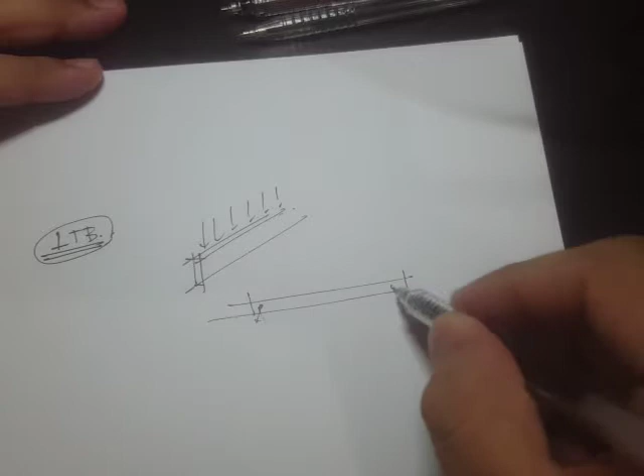One example is lateral torsional buckling. If we load a member in flexure, in a basic strength of materials course we are just taught that when you load this flexural member, what you get is a deflection, something like this. However, for steel structures or structural engineering, when you load this, it is possible that this cross section actually twists, something like this.

So that means it's also a failure, or from a design standpoint, we need to consider this. And you already know that this lateral torsional buckling only occurs because there's not much lateral bracing right here in the compression portion of the flexural members.

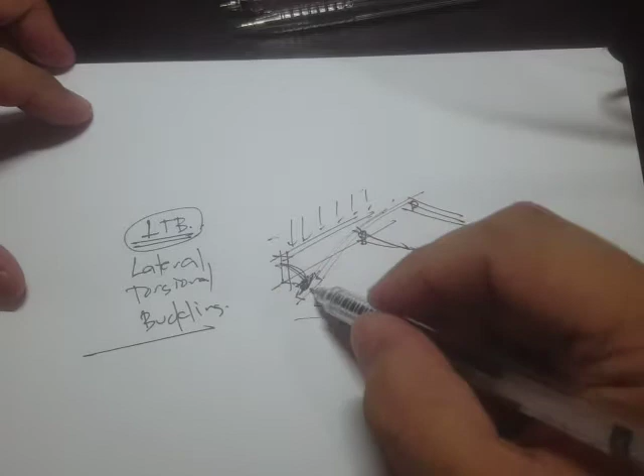And there are still many others, like for example the columns, axial members. So when you load this, then there's going to be buckling and things like that.

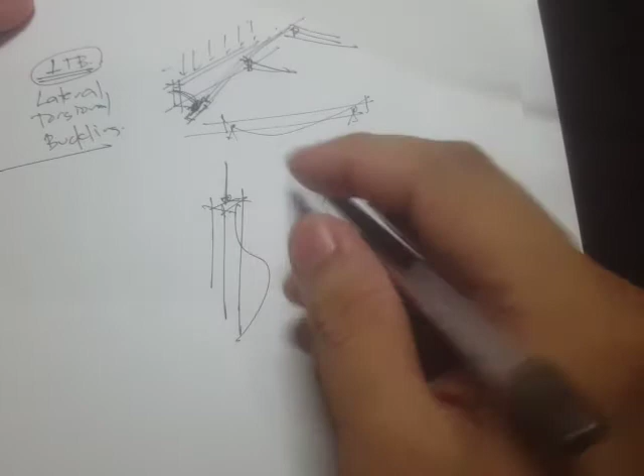So the reason I'm bringing this up is because if, let's say, you want to have a thesis about a machine or equipment, then probably you should consider, I suggest, the deflection aspects of the machine design.

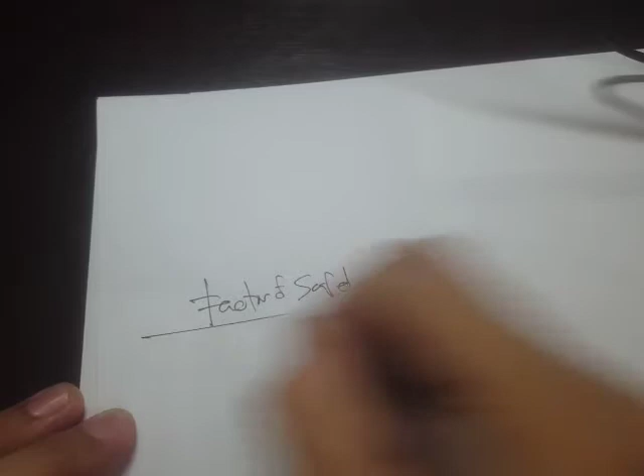Anyway, that's not our main topic, so let's get started regarding the failure theories and the factor of safety. As I've said, a factor of safety...

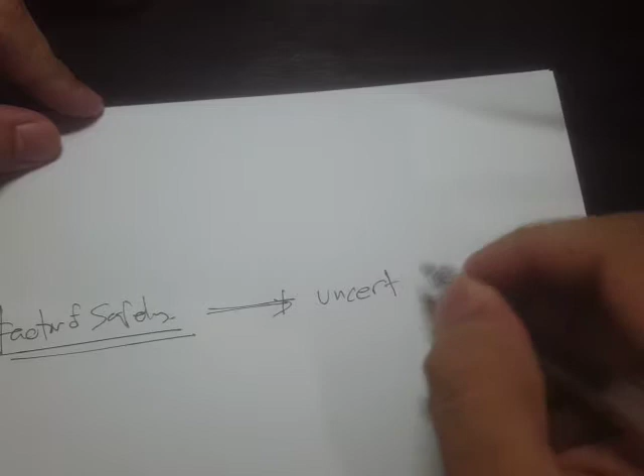When we talk about factor of safety, we are actually talking about design applications, and it's all about uncertainties. That's how I describe it. A factor of safety is roughly all about uncertainties in the design.

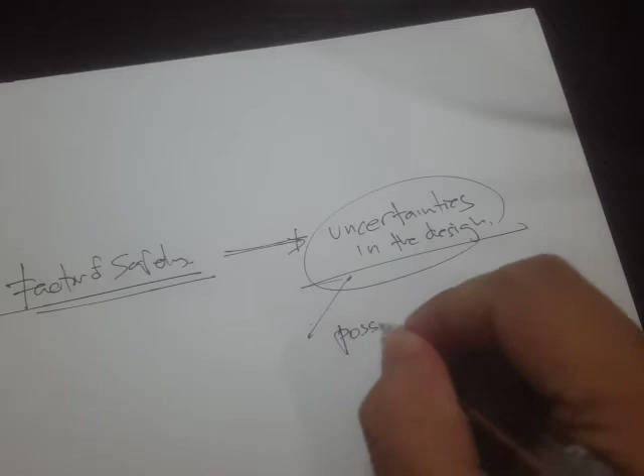And what are these uncertainties in the design? We can have examples, such as possible overloading or load estimations. For example, if we estimated a load, the question is: is it really the load that the part will experience?

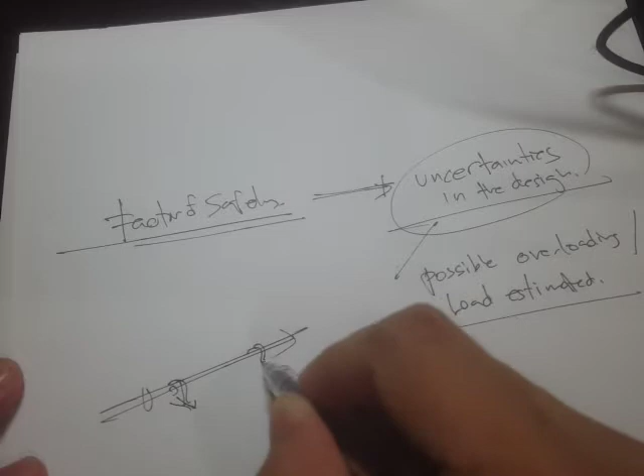during its service, right? For example, if we design a shaft, we estimate the load and compute the reactions and stresses, but in actual service, are the stresses the same, or would it experience possible overloading? So that's one of the uncertainties in the design.

Another uncertainty is the material, let's say material properties or qualities. What this means, or how I understand this, is let's say we have a steel specified as 250 megapascal for its yield strength. So SY is 250 megapascal for yield strength.

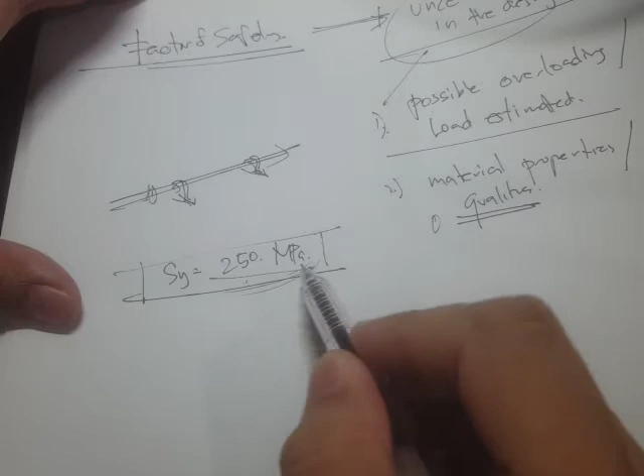Now my question is: is the yield strength of the part that you are going to use in the design going to have the same value? Is it 250 megapascal, or maybe it's lower? So there's going to be discrepancies or differences, and we can consider that as uncertainty.

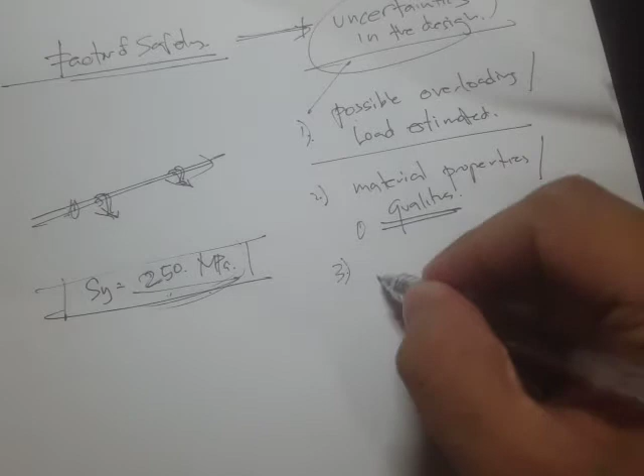Another one is the fabrication aspects. For example, in the drawing or the design intent, let's say we are going to load this part or this column in axial loading, and we design it so that this point load is actually acting at the centroid.

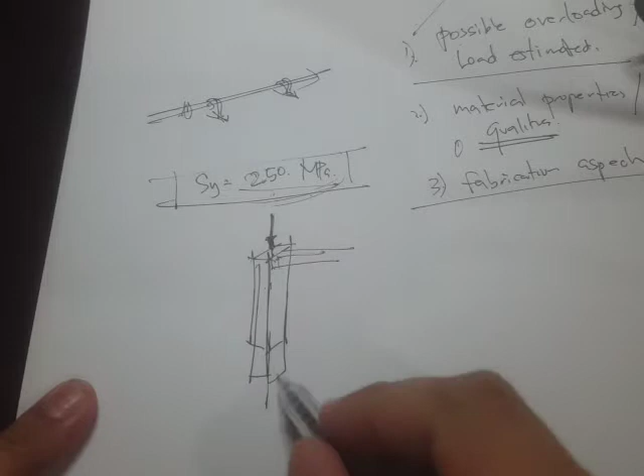However, due to fabrication aspects, like for example we have a brace here, and another brace, and of course during fabrication there's going to be welding on this part and another welding on this part. We know that in the welding process there's heat involved, and therefore there's going to be a temperature variation along or across this part.

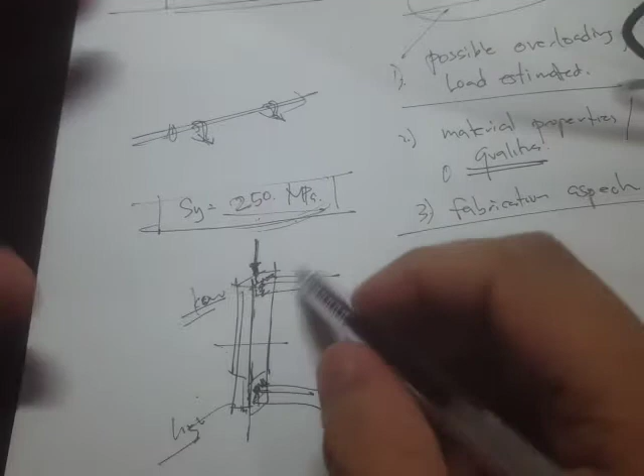If there's going to be an uneven temperature distribution, like this part being hot or high temperature and this one being low temperature, and if there's not enough bracing, then there's going to be distortion of this part. That distortion is a change in the geometry. So instead of having a purely straight part, if there's not enough bracing, it's probably going to end up crooked, something like this.

And the problem is that if you apply a load, instead of that load passing through the centroid of the section, it's not actually passing through the centroid, and there's going to be eccentricity. So because of the presence of eccentricity, you don't just have a normal load, but also a moment as well.

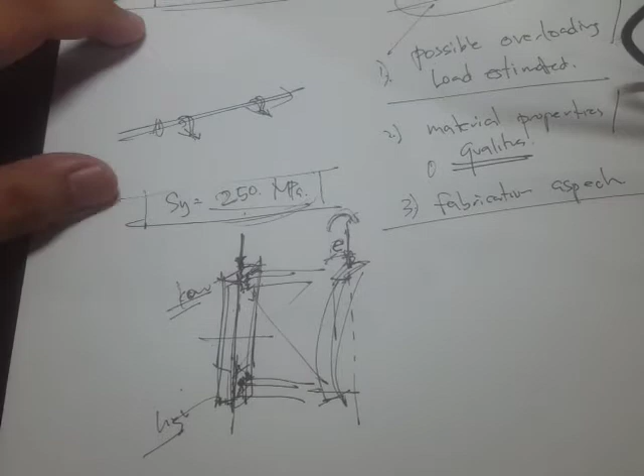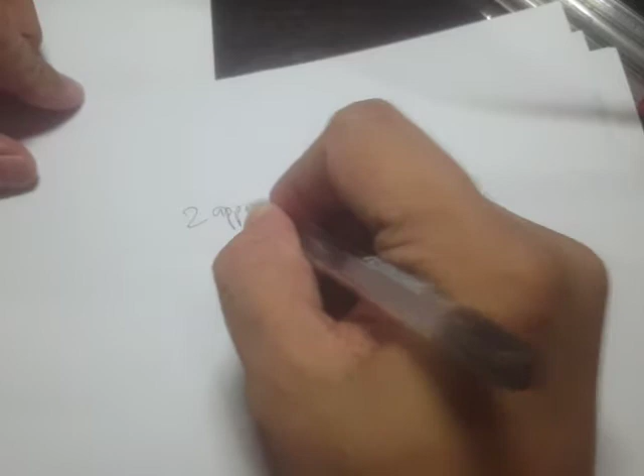So those are some of the uncertainties in the design, and there are still many others. So the question for a designer is: how do we guard ourselves from these uncertainties? You already know, in ABE161, the agricultural structures engineering course, about the two approaches for design. One is the ASD, and the other one is the LRFD.

This one is the allowable stress or allowable strength design. Although previously this was referred to as allowable stress design, they changed it to strength so that it's on the same basis as the LRFD. However, for machinery design application, I think allowable stress design is still the term that's being used.

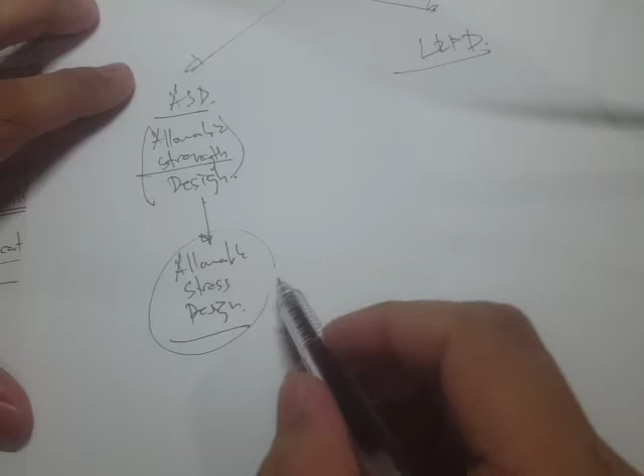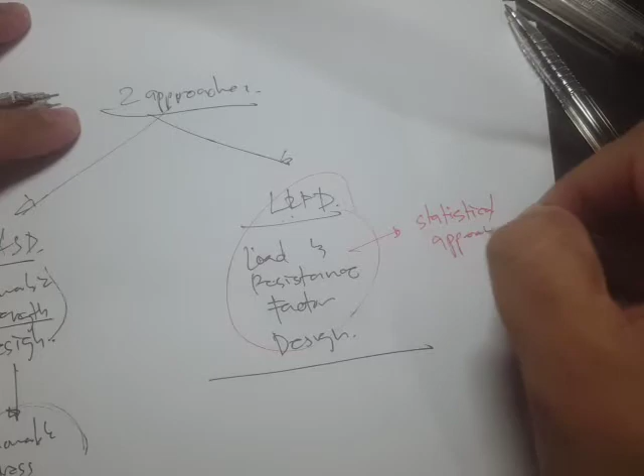And this one is referred to as the load and resistance factor design, LRFD. We know that this method is more statistical, a statistical approach, while the other one is a conventional approach, and you already know the difference.

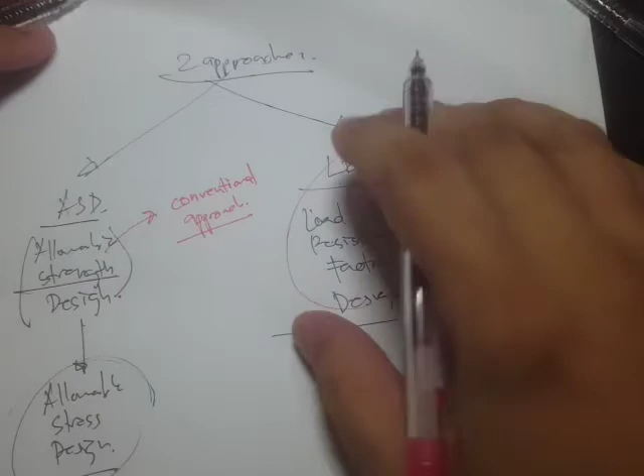We did also sample problems or computations regarding this. Although some machine design textbooks have included some portions or pages regarding this LRFD, or mention the statistical approach, in my opinion there's not much data regarding the use of this for machine design application as compared to civil engineering applications.

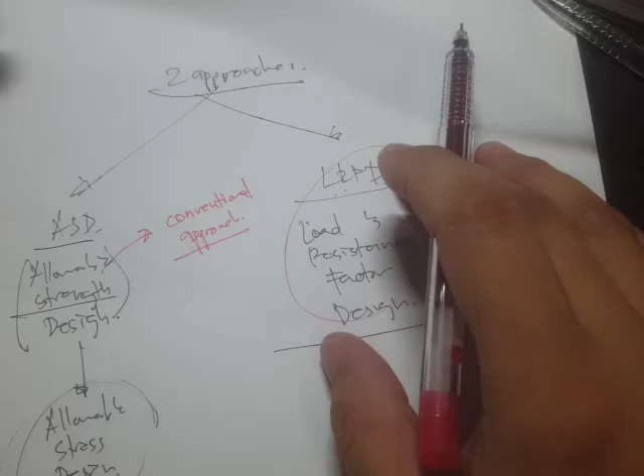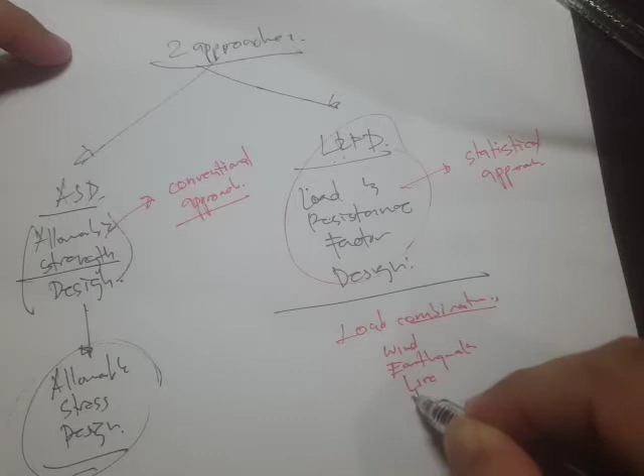For example, in civil engineering applications, we have load combinations. What if, let's say, we have a wind load and earthquake load and live loads and dead loads, or whatever loads, in combination acting on the building or the structure, then how do you work for it? They already have load combinations, and they have data for the live loads and things like that.

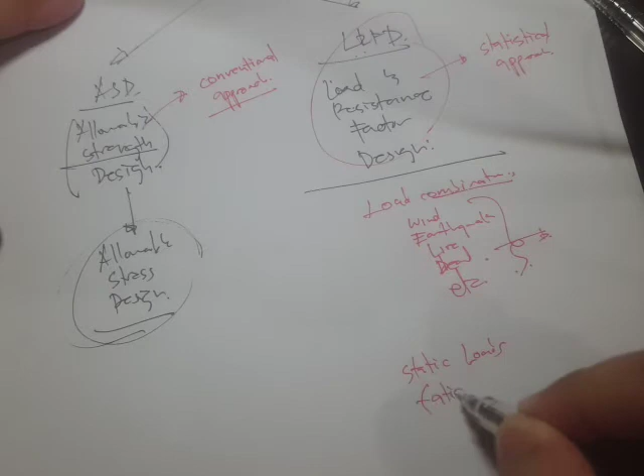So for machinery design application, I haven't seen yet data regarding, let's say, a combination of static loads and fatigue loadings or impact loads or whatever other parameters. I haven't seen this yet, so that's why we are not going to use this approach, and we'll just stick with this allowable stress design.

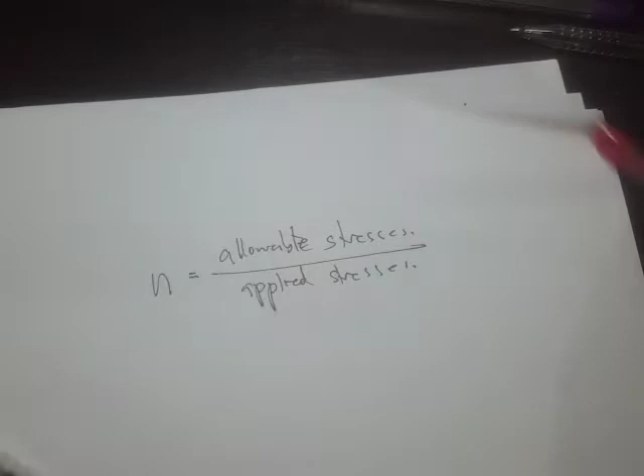So how does this factor of safety enter the equation? We have this equation: n, the factor of safety, is simply equal to the allowable stresses over the applied stresses. What that means is that the allowable stress is like our strength side in the LRFD, and the applied stress is the load side.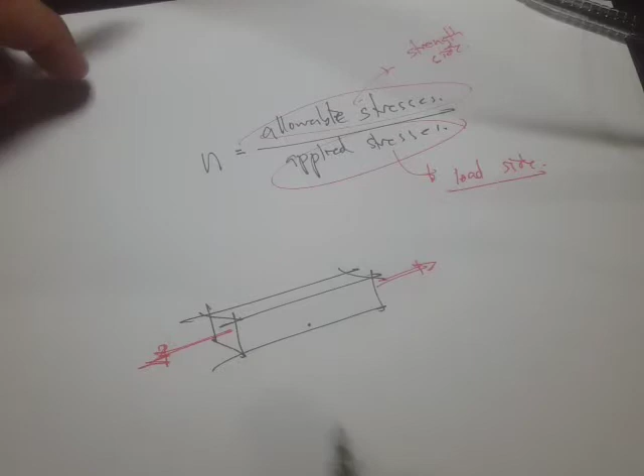Because the idea for the design is that if you have this part, let's say we load it in tension, then usually for the design we don't want this part to fail. So if we don't want failure, we can divide it in terms of the strength or the capacity.

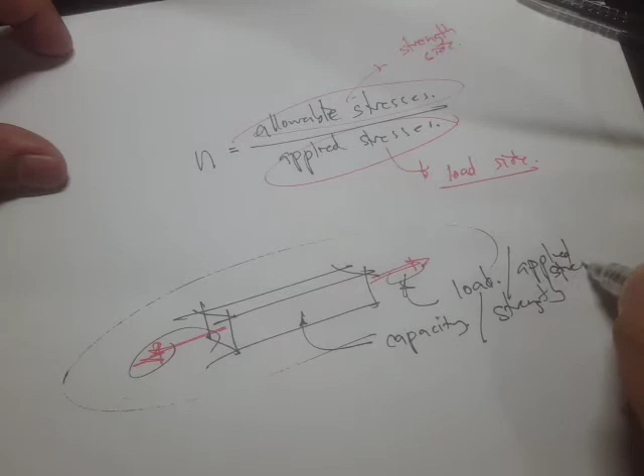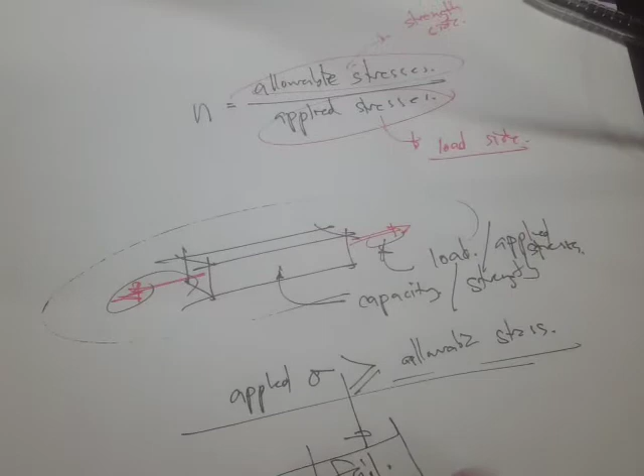So it has a capacity or strength and the load that you are going to put on this part: the load or applied stresses. If the applied stresses are greater than the strength, the allowable stress, or the capacity, then that means the material will fail. Typically, when we design, we don't want our part to fail. So here's our equation for the factor of safety.

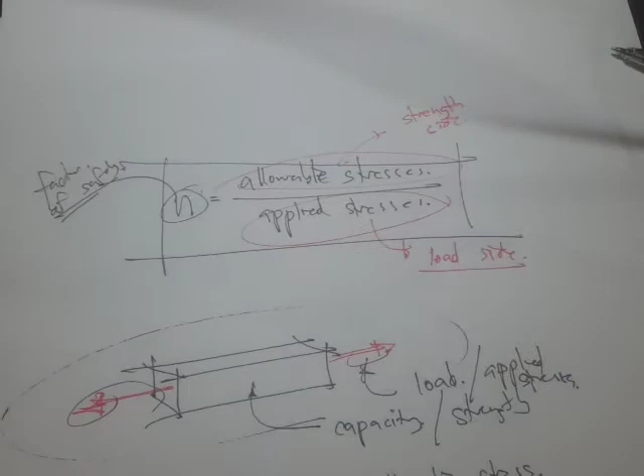We can also describe factor of safety in terms of geometric illustrations, because later on when we talk about failure theories, it can also be an aid to refer to the diagrams.

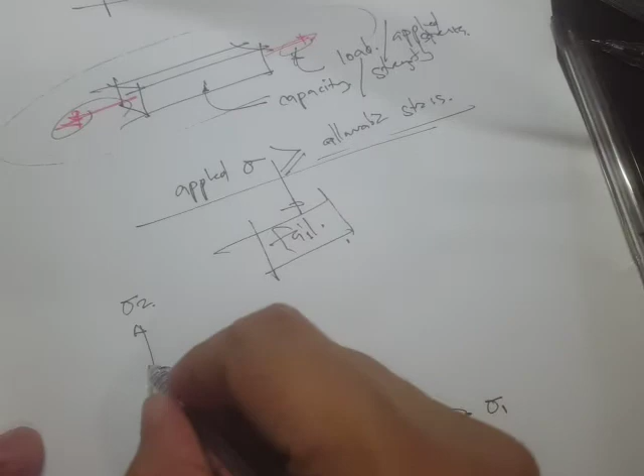Typically we'll have a graph of the principal stresses, the maximum stress here, and the minimum principal stress here. We'll have some curves, for example this is SY, the yield strength, and we'll also have yield strength right here. So here's our failure, this is what we call the failure locus line.

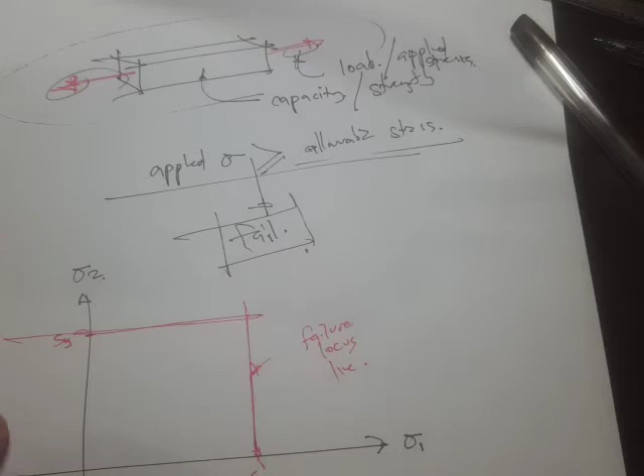If you are outside the failure locus line, then that's unsafe, and if you are inside, then you are in a safe region. This is just an example; there are many other curves, and we'll talk about that when we get into the topic on failure theories.

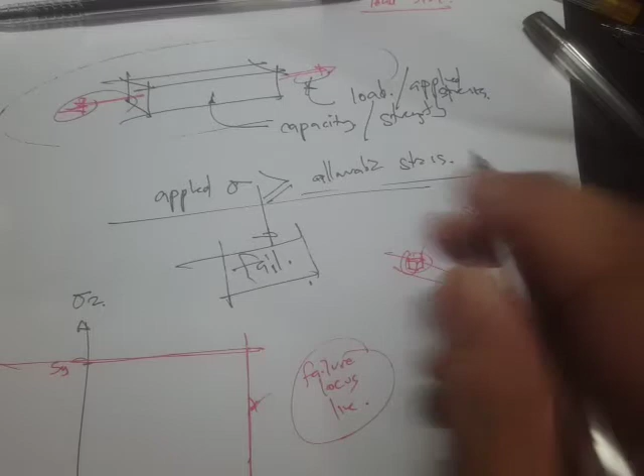But regarding this factor of safety, this is the strength side. Our load side would be, let's say we have a part and we load it in flexure, axial, and also torsion, and we compute the stress state here. So stress state is something like the actual loadings experienced at that point.

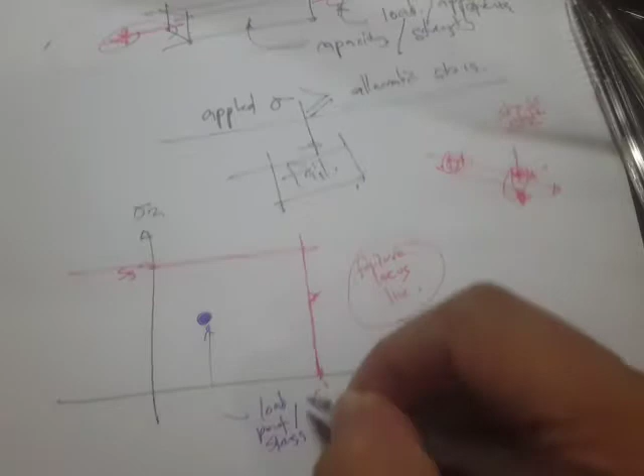At that point we have a load point right here, so here's our load point, or stress state. And the factor of safety is that we'll project a line from the zero point to this load point, and of course we are going to intersect this failure line, and there's going to be a point right here.

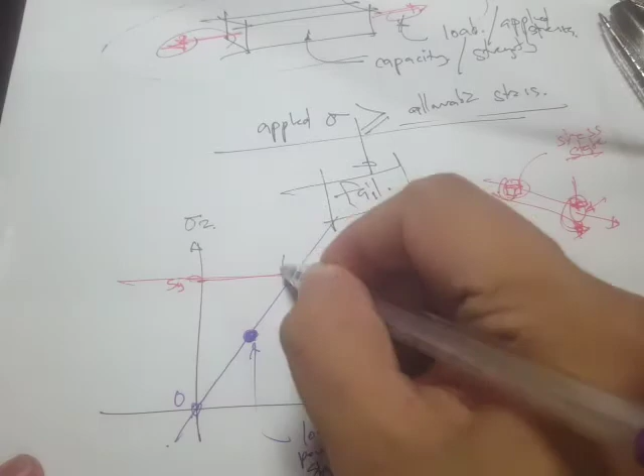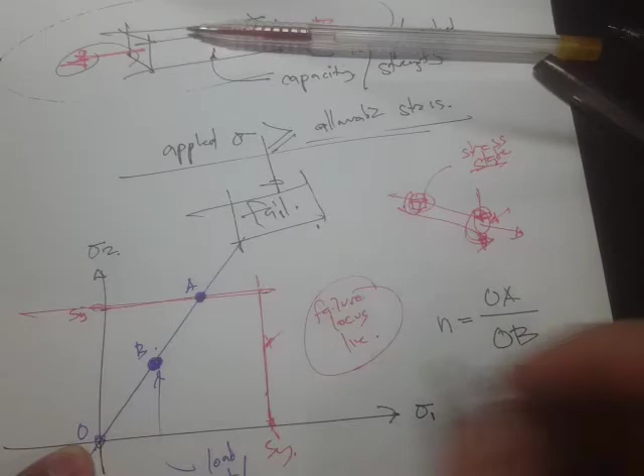So let's say this is point O, this is point A, and this is point B. We can say that the factor of safety is simply the strength: the line from point O to point A, divided by the line from point O to point B, because that is the load side and this is the strength side. Let's label this: this is the load side, and this is the strength side.

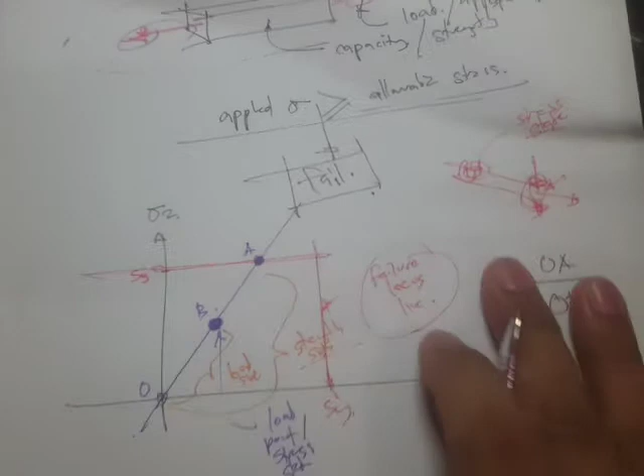The strength could be in terms of yield, ultimate tensile strength, or endurance limit, and we'll discuss that in detail later. So if this is the numerator and this is the denominator, that means we'll have a value of n greater than 1. If n is greater than 1, that means we are safe. The more you are away from this, the more safe it is in terms of this concept of factor of safety.

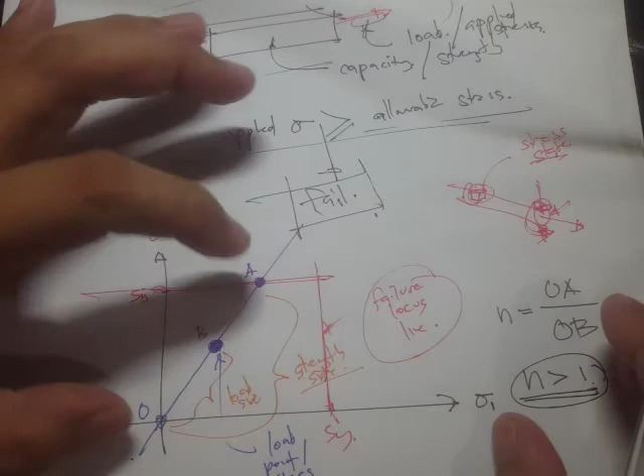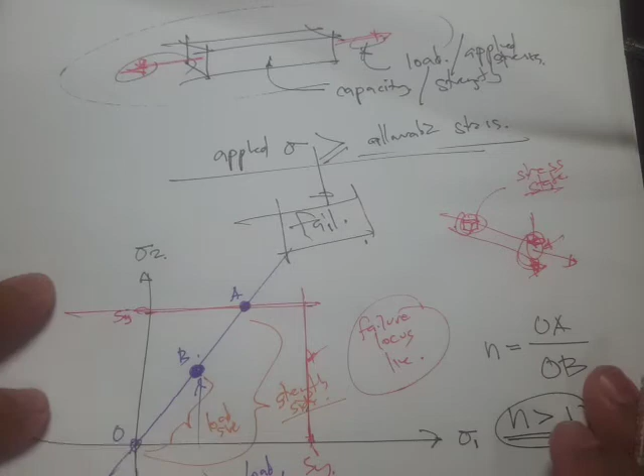But of course, the more you are away from this, practically there's another factor that comes into play, another aspect of design, and that's the economics. So anyway, that depends upon the designer. It's up to you if you want a larger value of factor of safety, depending on your design situation and the designer.

So if we have n less than 1, that means the denominator is larger compared to the strength side, then that's going to be failure.

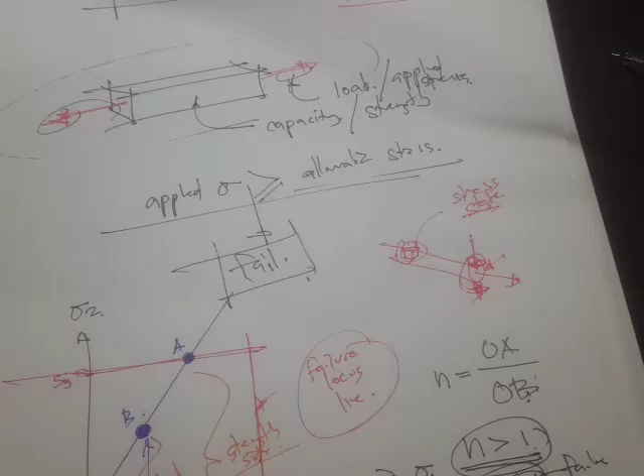I'd like to show you one from one of our reference textbooks about recommended values for a safety factor. By the way, this textbook is by Juvinall and Marshek, Machine Component Design, and there's a portion about the recommended values for a safety factor.

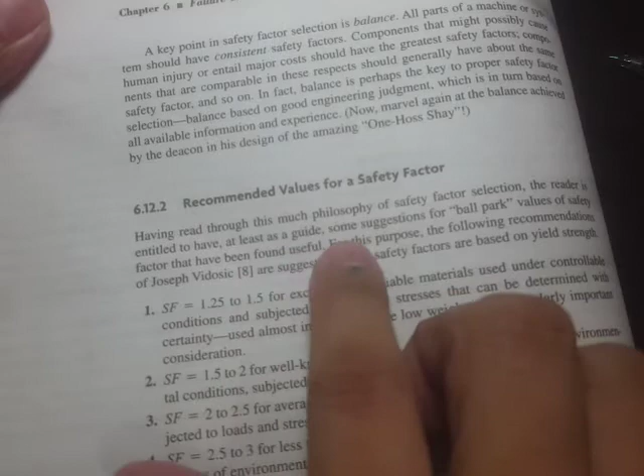Instead of computing the values of a factor of safety from the failure theories, there are some ballpark values, some suggestions, at least as a guide. The point here is that we can have a feel or grasp of understanding regarding the range of values for the factor of safety.

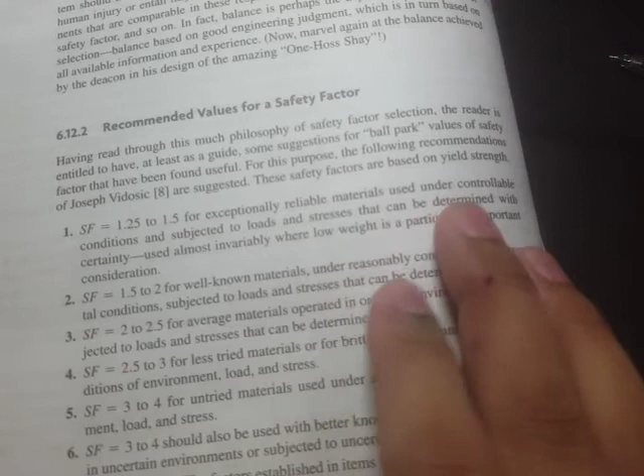It says here, for example, if we have exceptionally reliable materials used under controllable conditions and subjected to low stresses that can be determined with certainty, then typical values for the safety factor is 1.25 to 1.5.

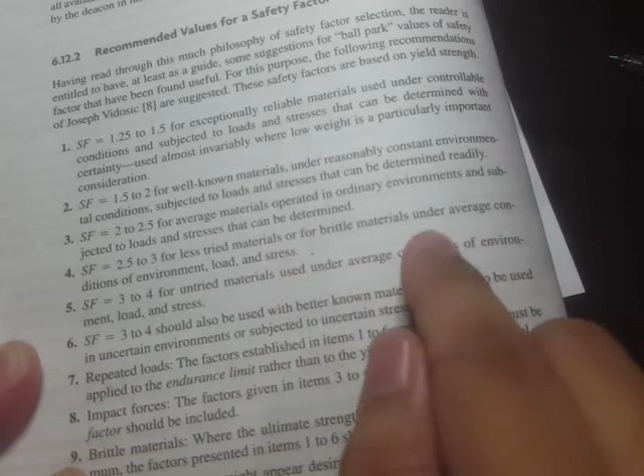Let's move on to number 4. For example, we have less tried materials, or brittle materials under average conditions of environment, load, and stress, then the factor of safety increases to 2.5 to 3.

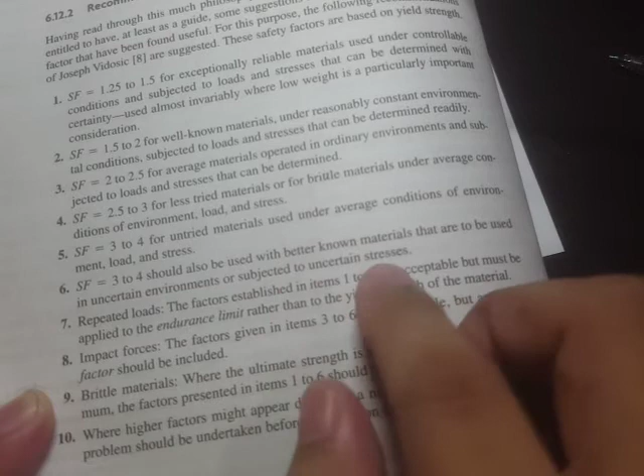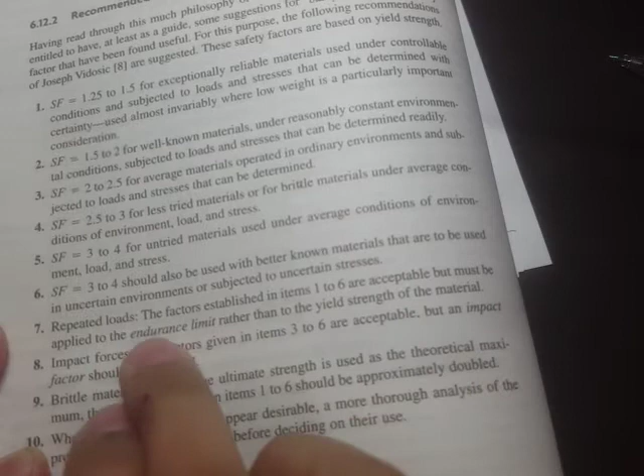And for better known materials to be used in uncertain environments or subjected to uncertain stresses, the factor of safety increases to 3 to 4. And if we have repeated loads, we can use safety factors from items 1 to 6, but it must be applied to the endurance limit rather than the yield strength, and we know the endurance limit is far lower than the yield strength of the material.

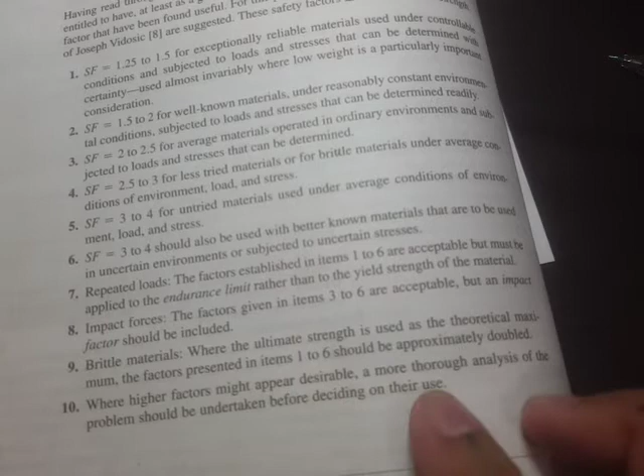And if we have impact forces, the factors given in items 3 to 6 are acceptable, but the impact factor should be included. There are also remarks regarding brittle materials in number 9, and number 10 says where higher factors might appear desirable, a more thorough analysis of the problem should be undertaken before deciding on their use.

So those are the ballpark values for the safety factors.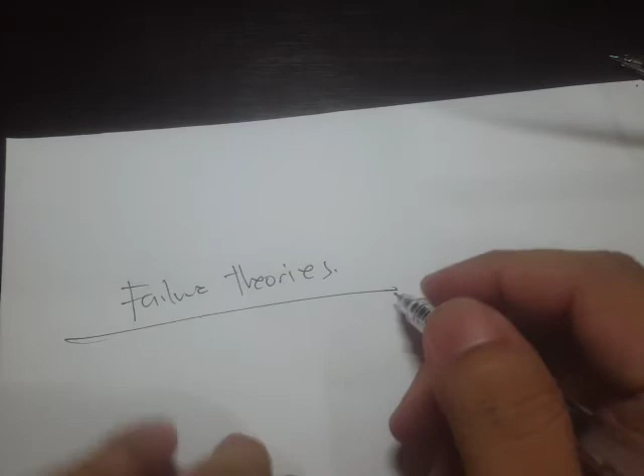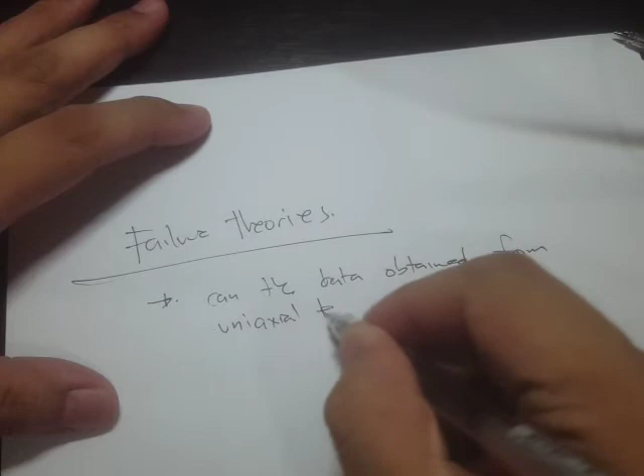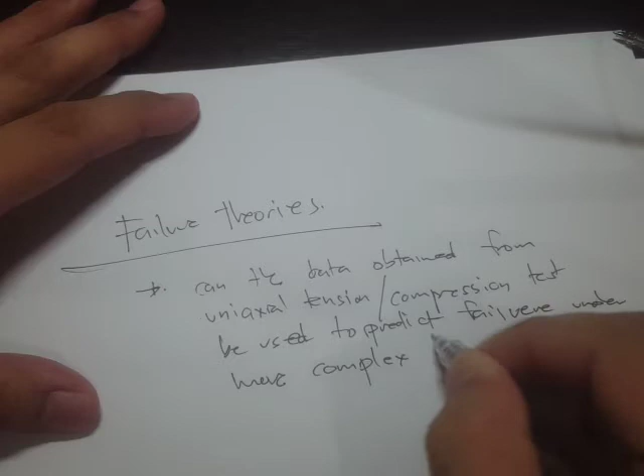All right, now let's move on to the failure theories, or actually sometimes referred to as criteria or criterion. Basically the concept is that can the data obtained from uniaxial tension or compression test be used to predict failure under more complex loadings? This statement is taken from the textbook by Pytel and Kiusalaas, 2012.

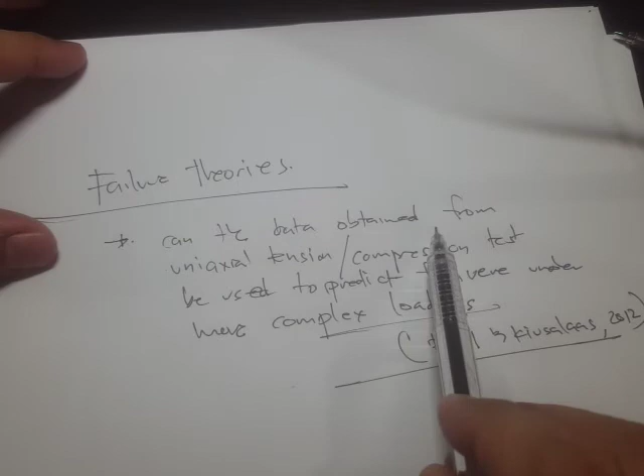The textbook is Strength of Materials. So again, when we say failure theories, the idea is can the data obtained from the uniaxial tension or compression test be used to predict failure under more complex loadings?

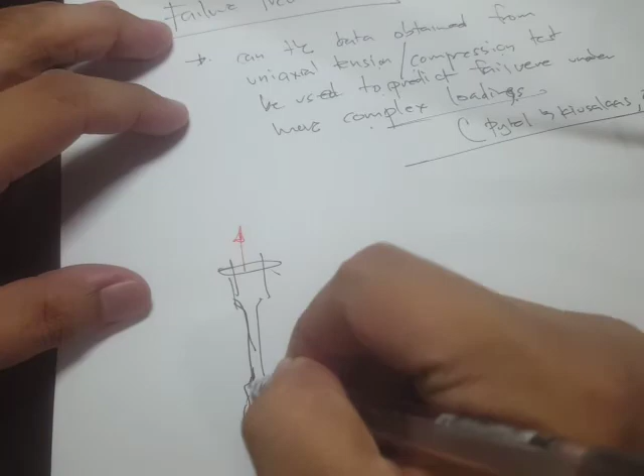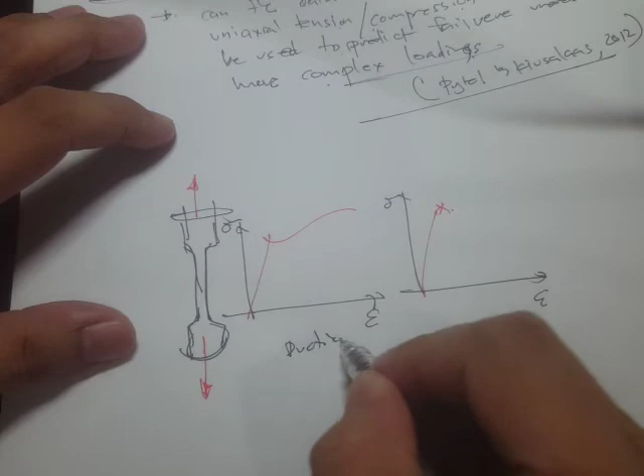So what it means is if we have a test specimen and we subject this to uniaxial loading - meaning just one axis or one direction - because of this uniaxial test, we obtain a graph of the stress-strain curve. For example, we have a ductile material and a brittle material, shown here on stress-strain axes.

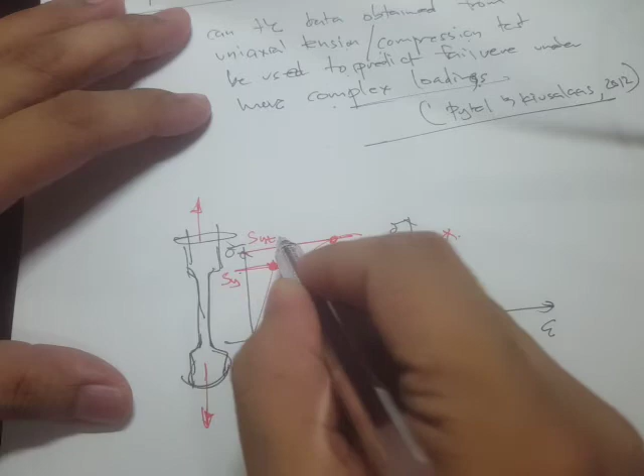In the simple tension test, we have this value right here, that's the yield strength, denoted SY. And right here, we denote this as the ultimate strength, SU, in tension. But for brittle materials such as concrete or some cast irons, we only have fracture, so that's SU only - SUT if in tension, or SUC if in compression.

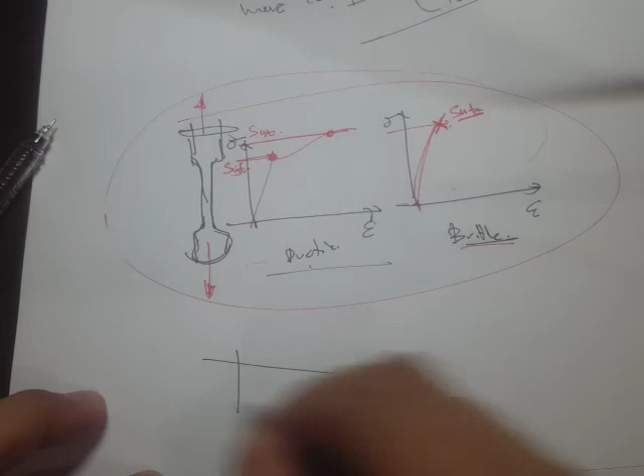So can this data be used for, let's say, a more complex part, or just a simple member, but subjected to more complex loading? So let's say we have axial, shear, torsion, and moment. So how do we predict the failure?

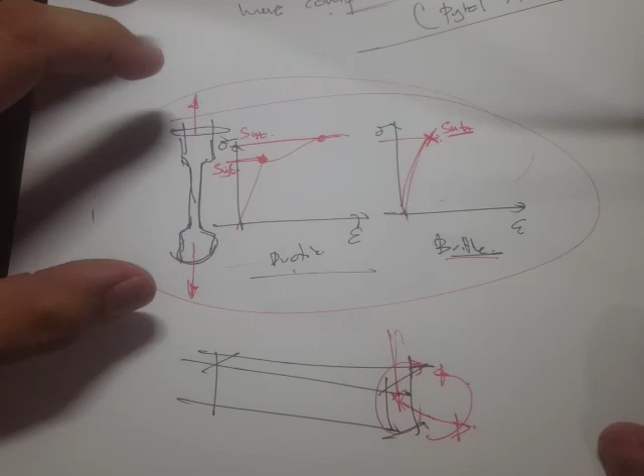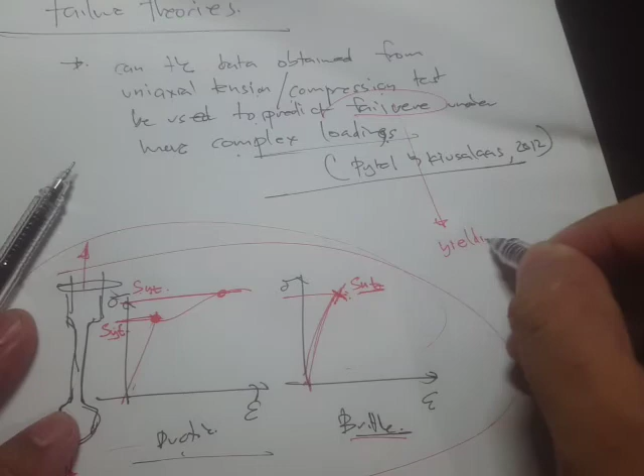Because in this uniaxial test, we know that as long as the force or applied stresses reach this SYT, then it will start to yield, or start to fail. By the way, when we say failure, we mean yielding or fracture. Of course there's going to be fracture here too, but for brittle materials, that's usually the governing failure mode. For yielding, usually this is for ductile materials.

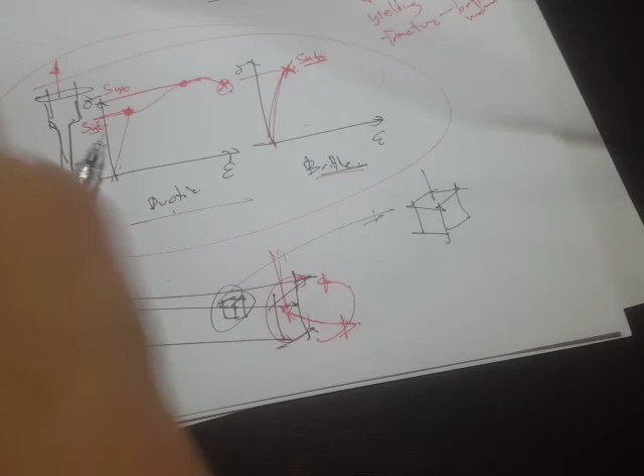So with complex loadings, recall that we computed this stress state. For example, we selected the critical point, the most critical point, and we use this concept about the stress state - say we have shear and things like that - and then we also drew the Mohr's circle to determine the maximum shear, tau max, and also the principal stresses, sigma 1, sigma 2, and sigma 3.

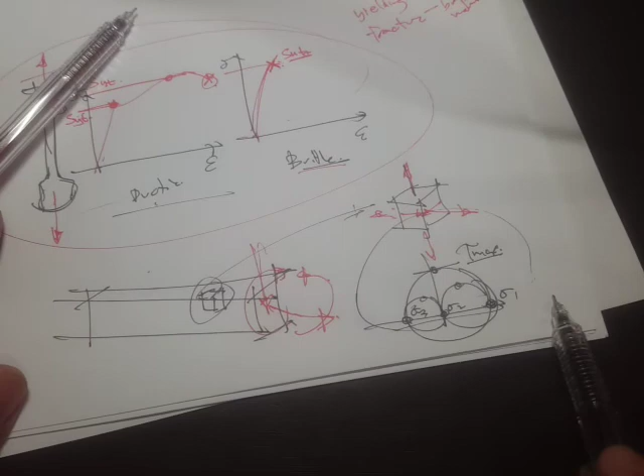And the idea is that if this principal stress reaches the yield, or reaches this ultimate strength, or if the shear max reaches the shear yield stress - by the way, there's another one, S sub SY, the shear yield strength - so we'll have to compare these two.

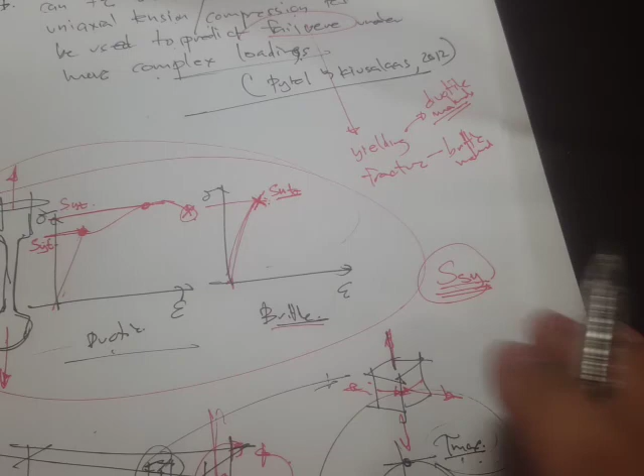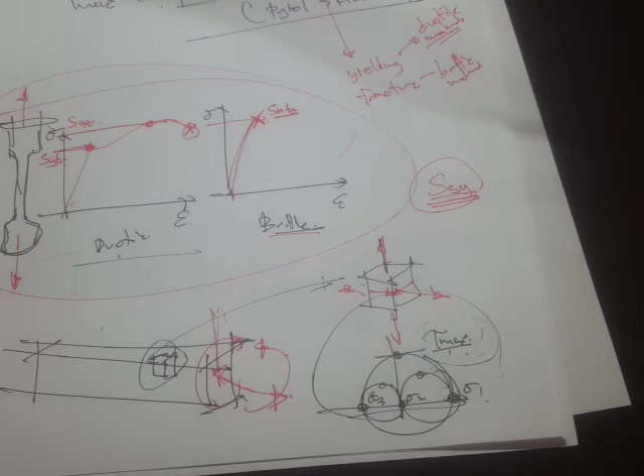Or take the ratio of these two, because this is something like the strength side - the yield strength or ultimate strength is the strength side, and this will be the load side. Because of that, as we discussed earlier about the factor of safety, we can determine the value of the factor of safety.

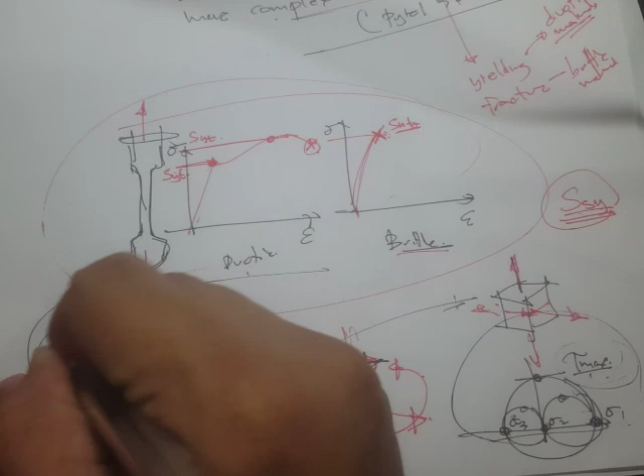So we have the strength, S, and the loads on the load side. Or if this one is given and that one is also given, then we can solve for the allowable, or design stress - I mean the working stress for the load side. So if N is given, and since the strength side is usually obtained from the data, then we can solve for the working stress.

Okay, so I guess that's all for this video. We'll continue our discussion in the next video.